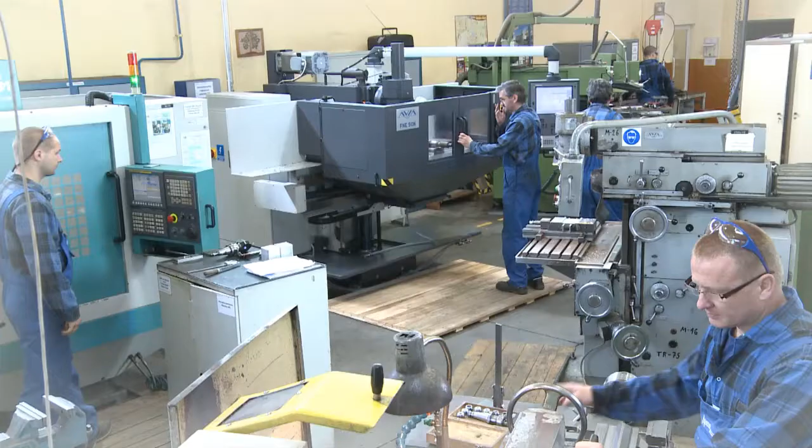Apena-Remont Ltd LLC was founded on 18th of October 1998 with the repair department of Factory of Electrical Devices Apena SA. Currently, General Electric Power Controls is its foundation.

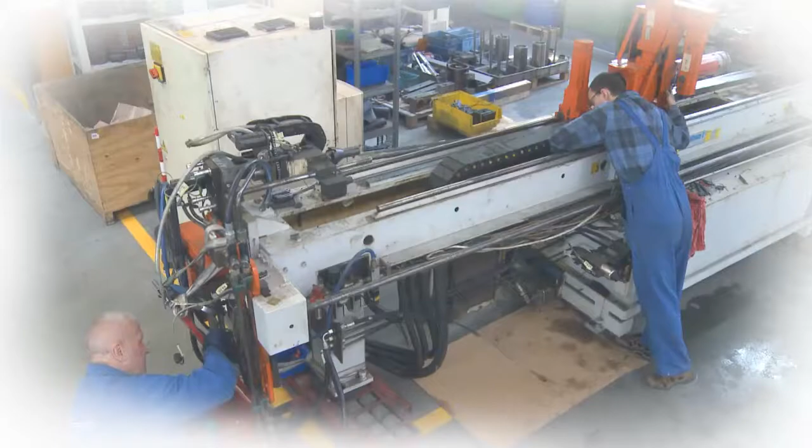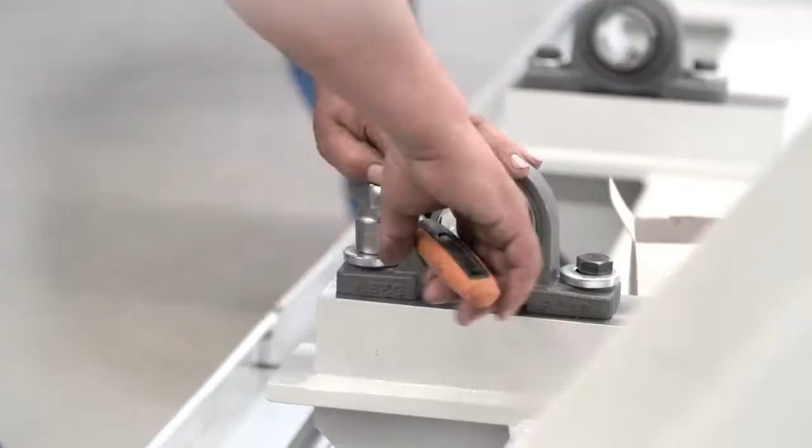The company started its economic activity on 1st of January 1999. Two of the main activities of the Apena-Remont company are running repairs and overhauls of machines and industrial devices, especially in the automotive industry.

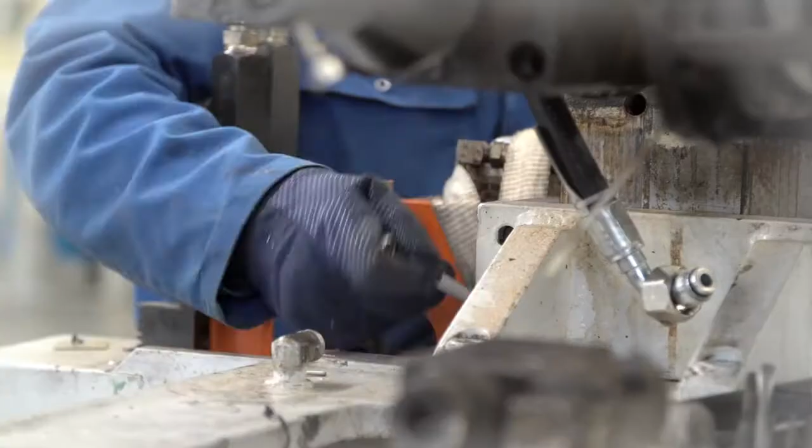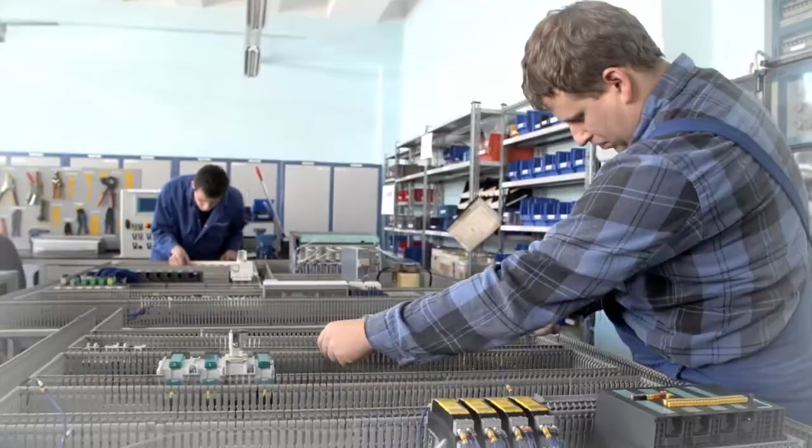90% of replacement parts used by Apena-Remont are original, but in some cases, with older technical solutions, it develops and creates new parts in-house. Fulfilling current safety requirements also forces development and creation of new control systems.

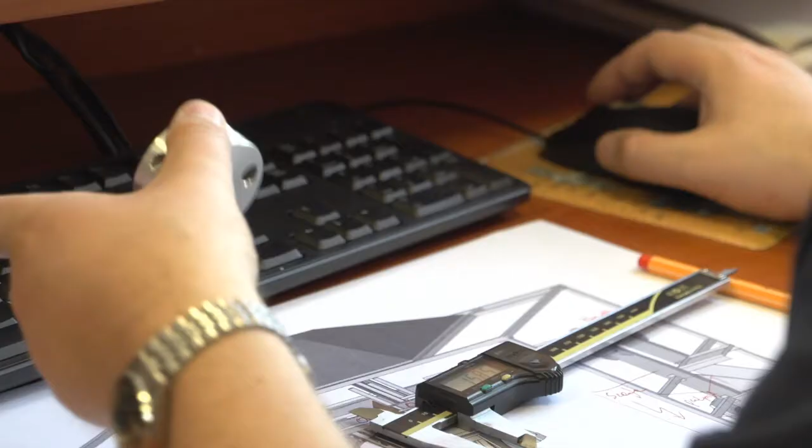These services are provided by the aforementioned Design Technological Office, together with the Electrical Department and Machining Department. The workstations have been furnished with modern computer equipment with software allowing 2D and 3D design of details and sub-assemblies, and designing of new diagrams of installations and control systems.

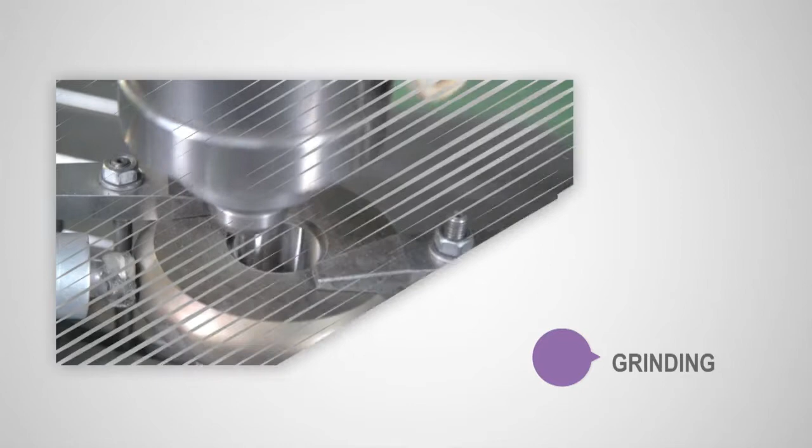The machining department, existing since the company's inception, has been modernized and furnished with all kinds of conventional and numerical machines which allow planning of complex technological operations of turning, milling, grinding, and of heat treatment and electromachining.

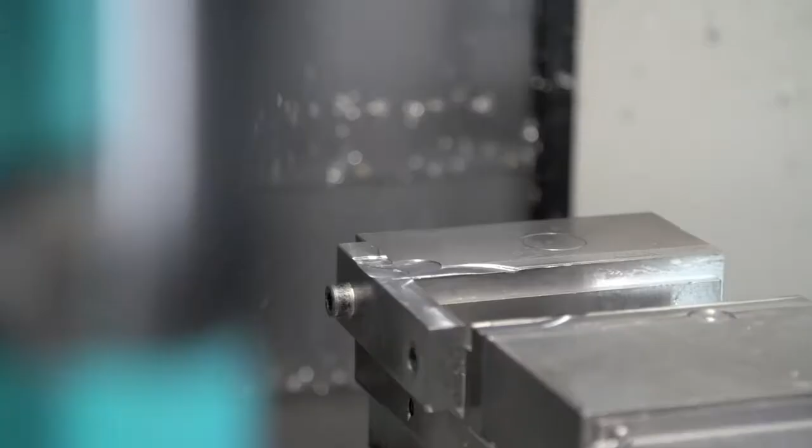An example of using modern technologies is the use of CNC machines, which facilitate precise and repeatable creation of details in a short time.

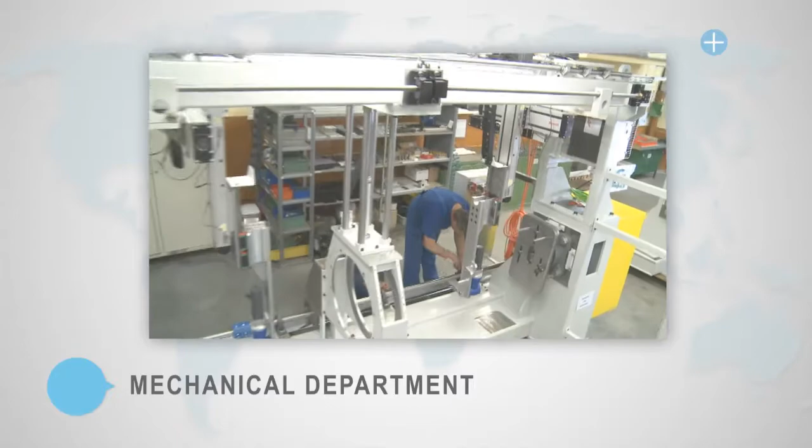Parts of sub-assemblies, thus designed and created, end up in the mechanical department, where a team of designers relying on documentation and new diagrams of installations precisely restores productivity of machines.

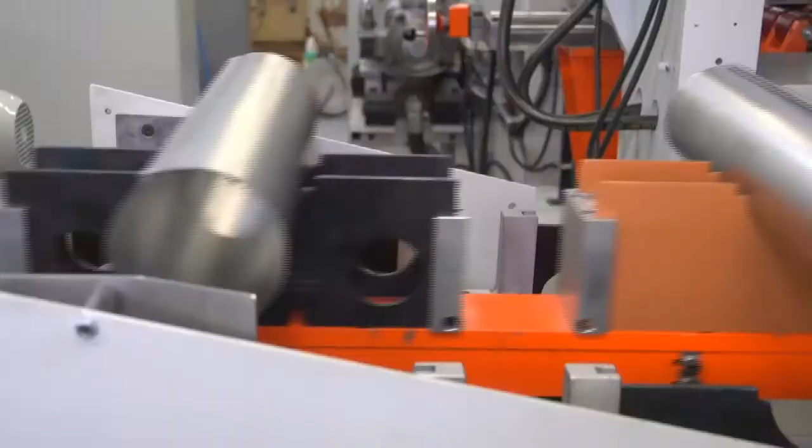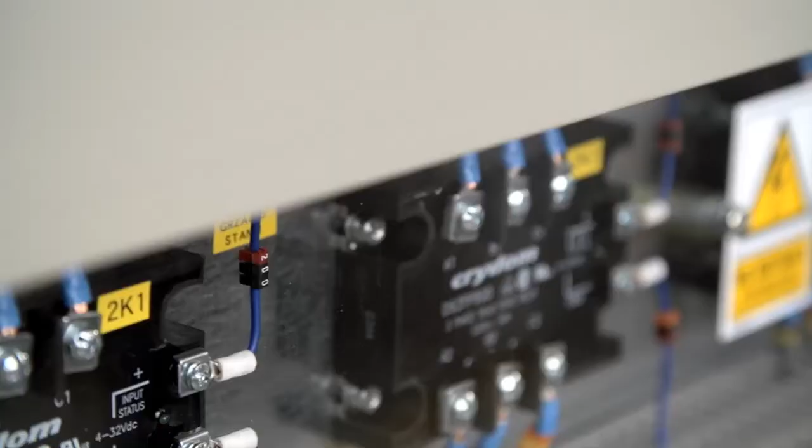New electrical, pneumatic and hydraulic installations improve their parameters and ensure safe operation. All electrical installations of Apena-Remont fulfill the requirements of the European directives and of the performance level D and E.

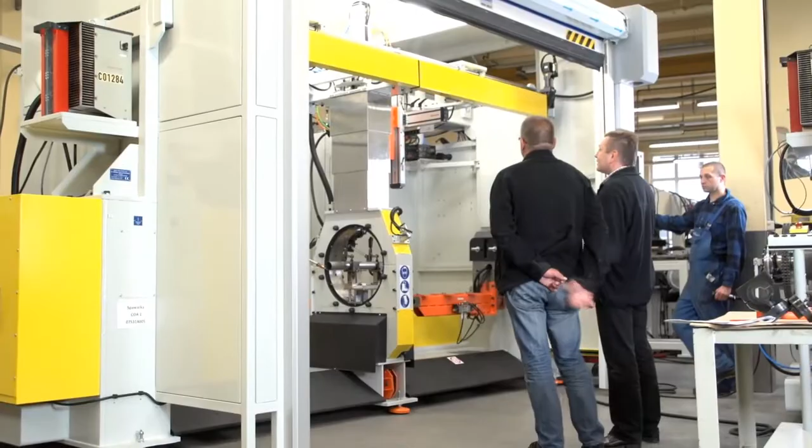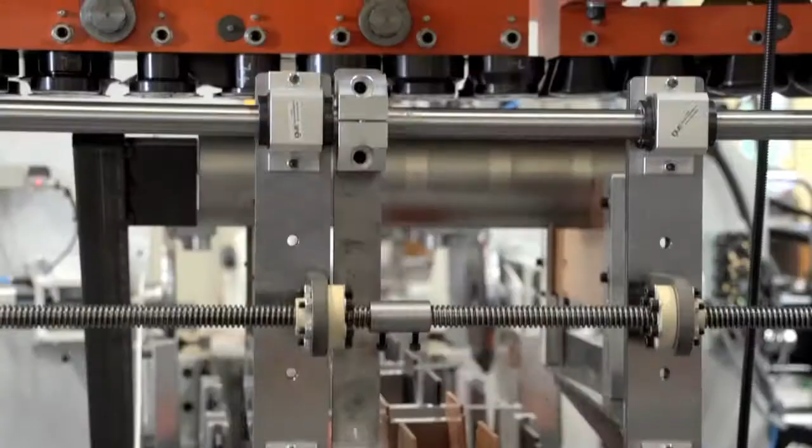When the repair of a machine is finished, it is tested and checked with the participation of the client's personnel. Since its foundation, the Apena-Remont company has been providing warranty and post-warranty services concerning maintenance of machines, installations and industrial facilities. Within these services, defects occurring in machines, devices and technological installations are repaired and removed.

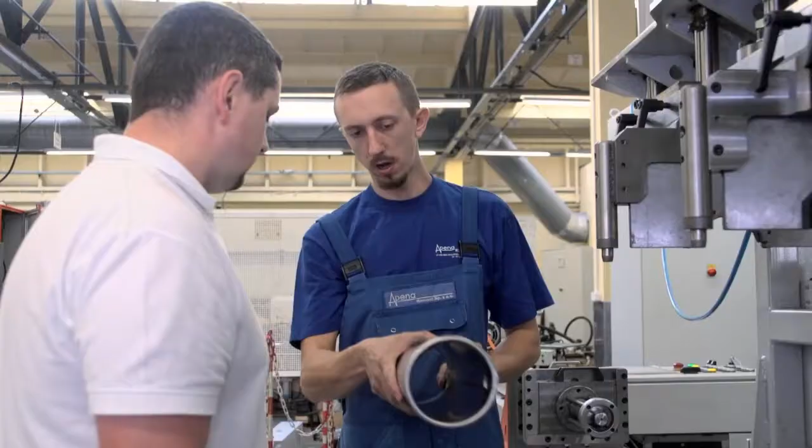The company performs inspections and maintenance of machines and specialized technological lines. The aim of all these activities is to sustain existing production capacity of companies, detect possible defects early, and, in case of malfunctions, remove problems and resume production as quickly as possible.

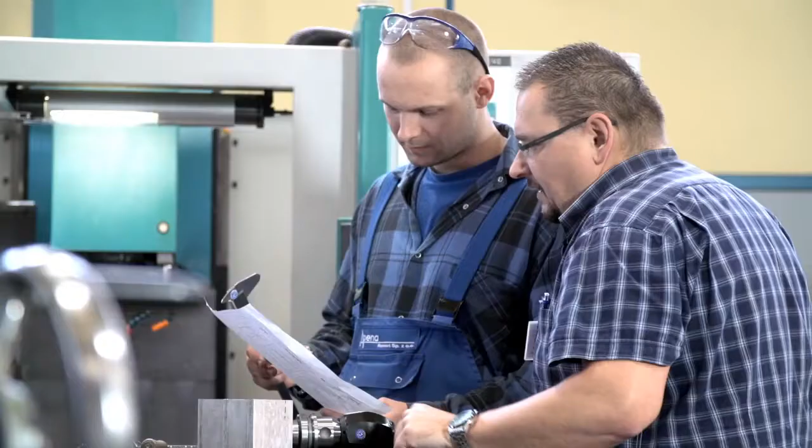The experience the company has gained from performing repairs and its cooperation with companies from the automotive and machine building industries have resulted in creation of many new technological solutions and construction of new workstations.

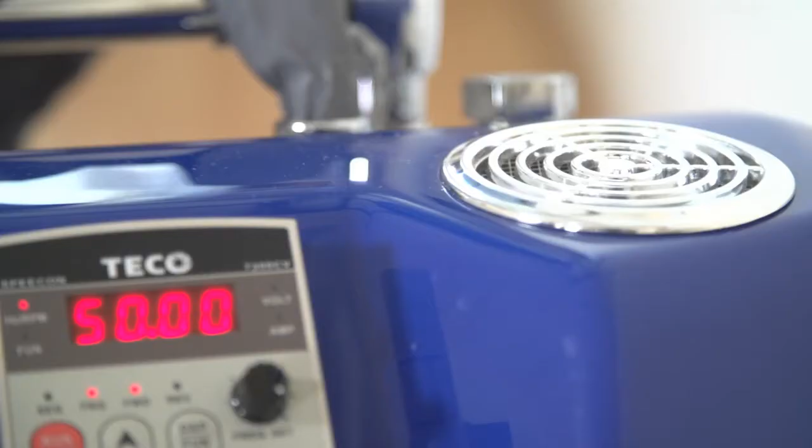In the difficult healthcare industry, Apena-Remont has achieved a major success in innovation by designing and manufacturing the UMR rehabilitation massage device.

In support of ecology, Apena-Remont performs many activities lowering its impact on the natural environment. Pro-ecological activities of the Apena-Remont company are a way of supporting its personnel and inhabitants of Bielsko-Biała.

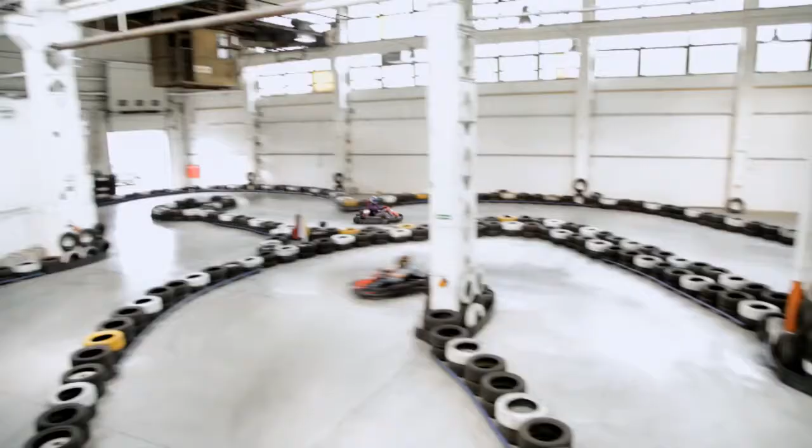In 2012, the company adapted and renovated an old factory building and created therein a kart track, the longest in Poland, multi-level roofed, called zigzag karting.

It has become a regional attraction and a place where young racing talents develop under the tutelage of well-known Polish rally drivers.

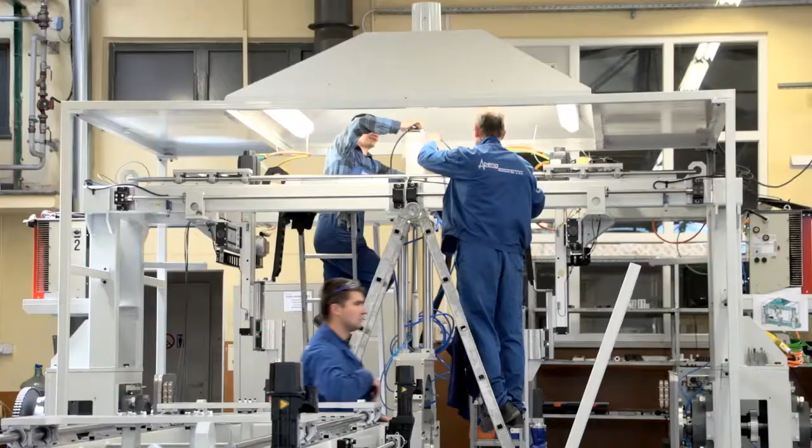Apena-Remont directs its offer of services mainly to companies with many machines and production lines. We are an innovative company whose philosophy is to provide clients with modern solutions in the area of repairs and modernization of machines.

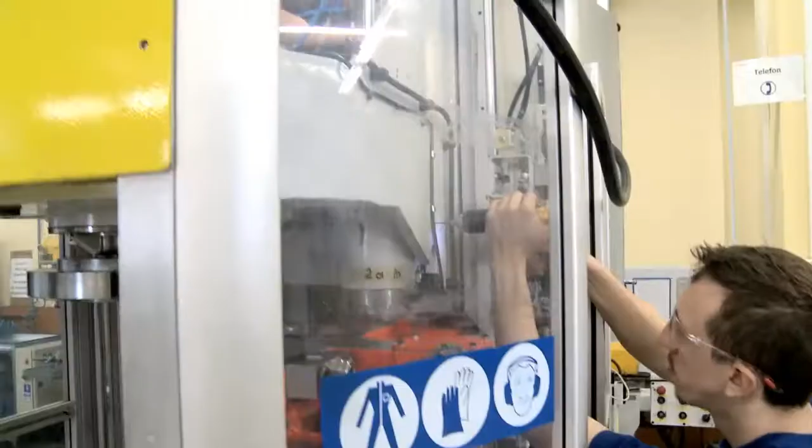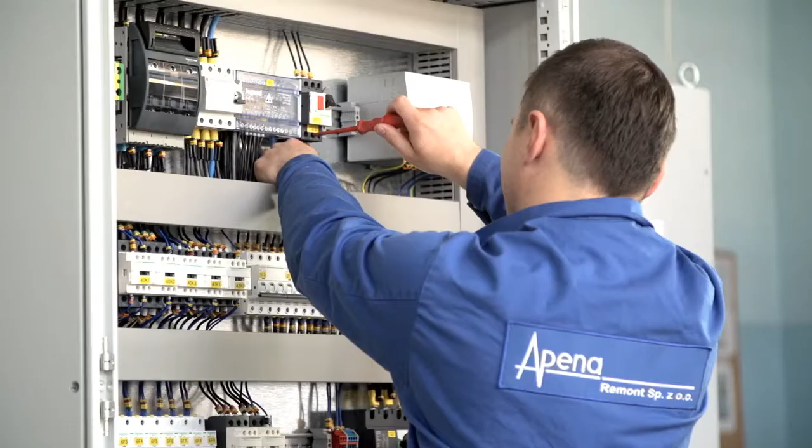We want to be a well-known, globally important company which always fulfills the high requirements of its clients. Through the marriage of tradition and modernity, and its dynamism and responsibility, we strive to create a company which can truly be trusted.